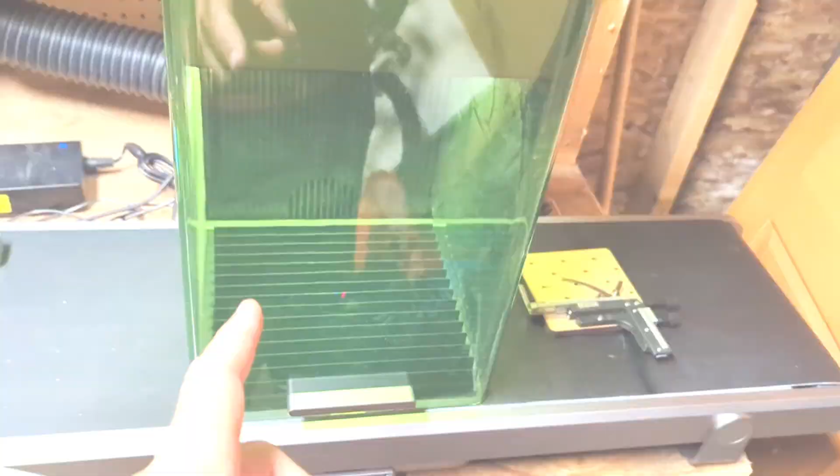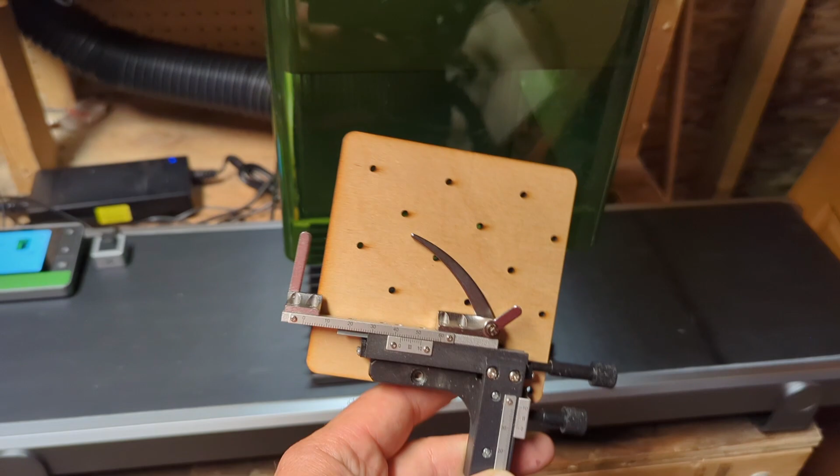So why is this being called the Ultra? Well, there's many reasons behind it. First, let's talk about engravable area. We have 220 square millimeters of engravable area. That's like just over 8.5 inches for you non-metric folks. As a comparison, this is a jig to fit the regular F1, so you can see the area is significantly different. So that's an Ultra feature.

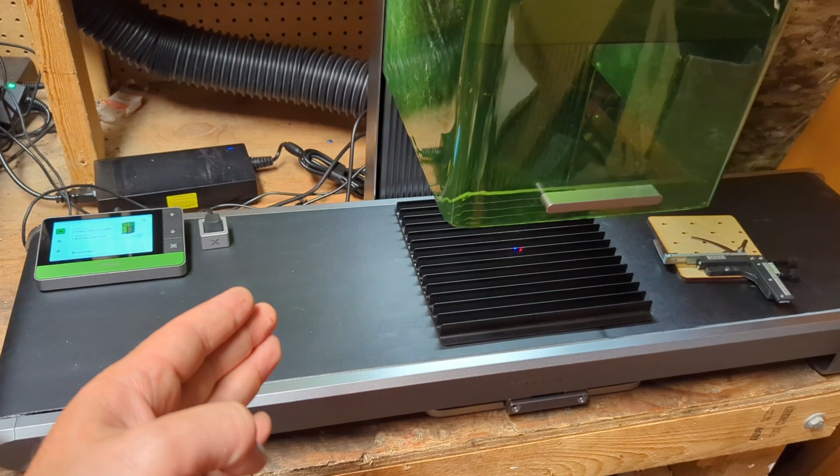If you want to grow it even more, you add on the conveyor belt. Now instead of 220 by 220, you got 220 by 500 millimeters. It allows you to do batches. I'm going to show you how to do it. It actually works surprisingly well. Also, longer items - you're going to see how this was done as well. So you can do this long barbecue scraper. You couldn't do that on regular units.

Another thing for the Ultra is upgrades to the laser. We got two dots down there. One is blue, that's 455 nanometers, 20 watt galvo. So you still have the blue laser, which is really functional. I got other projects over here. Obviously the other laser, that's a fiber laser - I'll talk about that in a second, but there is still a huge use case for having a blue laser. So the dual laser functionality is really cool. You can combine them, I have projects I've done as well. And then the other laser, the big part of the Ultra, is the 1064 nanometer infrared 20 watt fiber laser.

A cool thing with the machine, in true Xtool fashion, it's all enclosed, so the safety is there with the shielding. Also, you don't have the big cable exposed - the fiber cable is inside the machine. So this isn't really portable like the F1, but you can actually move this around. I wouldn't be taking this everywhere I go, it's not mega portable like the F1 is with the handle and the case and everything else. But the fact you can actually move this around and not have to worry about breaking, potentially damaging the fiber optic cable that's on your standard fiber laser systems, that's a big plus with this.

Of course, then you got the built-in air purification or just pulling it out. I had to drill a sizable hole on the side of my shop. So if that's something you're picking up, go on Amazon, order yourself a hole saw while you're at it.

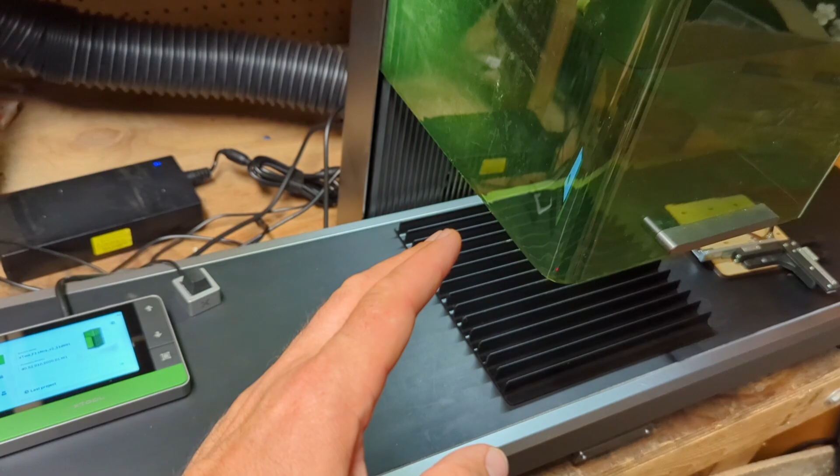Another cool feature with the F1 Ultra is you have autofocus now as well. Again, it's not the hardest thing in the world to do, but in the software, I'm going to show all this stuff in the video. You just push a button, it aligns the beams, away you go. It doesn't work 100% perfectly all the time - sometimes I was doing a blue business card, it was messing up on there. But I would say 9 out of 10, probably 19 out of 20 times, the autofocus works just great.

You also have this nice little panel now. Much like a 3D printer, you can actually put jobs on a memory stick, have them on board. You can go into your menu, so I can go onto it and store jobs right on there to make production really quick. You can push the button on here, or this is one of the accessories, the extra little button. It's like a keyboard button, and actually this is my favorite. For most of the stuff, I'm just hitting this one - brings back nostalgia on the old school keyboards.

There is also a foot pedal option as well. The floor - I don't even want to show you the floor in this shop, it's terrible - so I'm not using it right now, but I'll probably be taking this to my office at some point to hook it up, and I'll be using the foot pedal then. There's also the large air purifier if you're not running the duct system as well.

Again, I'm not having that in here. I got the duct system. So they got you covered for sort of everything you need.

Now, who is this system not for? If all you're looking for is a really high-powered fiber laser and that's it, this might not be the machine for you. It can do a lot of great things because it's a 20 watt fiber, but if you want to do those gorgeous deep engravings you see on pistols, for example, people do it on guns and they look amazing. I'm not a gun guy, but they look amazing, I appreciate the artwork. You're going to want a much higher powered laser, and if that's really what you're focusing on, this might not be the perfect machine for you.

But if you want to be able to do pretty much every type of job there is out there, engrave every material there is, this thing has you covered.

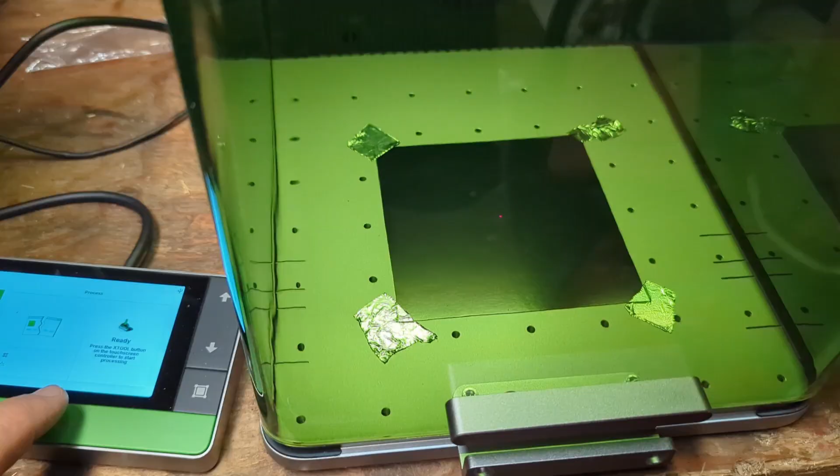What I'll do is jump into the first thing you do when you get this machine, which is calibrate it. Now, the reason I found this impressive - my background, previous to what I do now, for over a decade I made precision laser measurement systems, so I was all about lasers and cameras and calibration. You simply put in a piece of photo paper, hit a button, a couple hash marks are made, and you follow the prompts, punch in the offsets for the alignment, and you're done.

Now the first job I did when I finished the calibration, it said this has to go in this way with the fins going that way, not that way. So I thought, let's just engrave that on the back of this plate - black anodized aluminum, hit it with the fiber, and this is my first time using a fiber. The difference is absolutely massive between the blue lasers. So for metal engraving and that type of stuff, wow, the fiber laser is awesome.

So this took a couple hours to run, but I'll play you a little bit of that fiber sound.

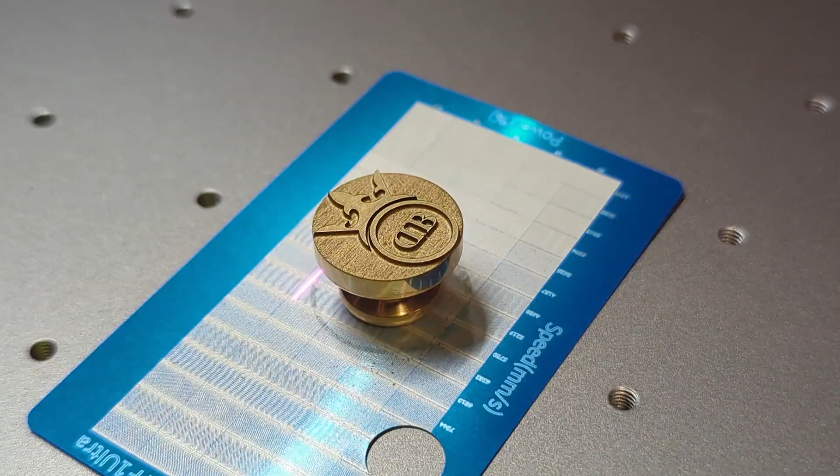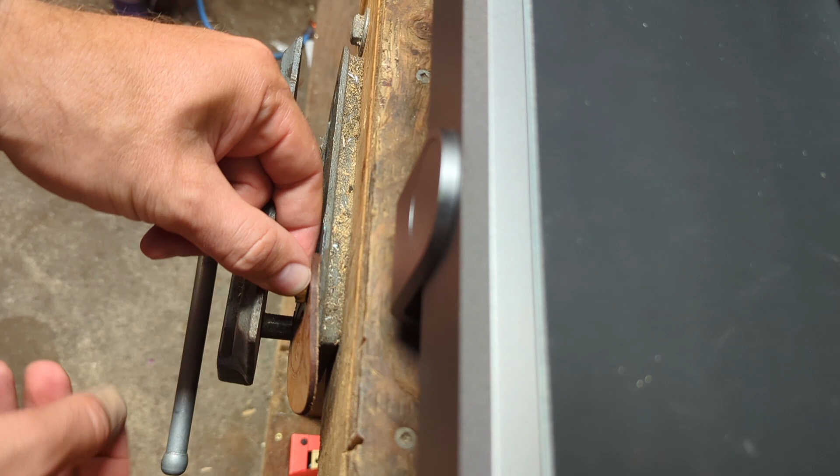Okay, so I'm not a leather expert at all whatsoever. Someone who is will be watching this, possibly just cringing at what I'm doing here. I'm just gonna put it on, I got the leather a little bit wet. I could just give it a whack, but I don't want to damage the laser because I got to share the bench. All right, there we go, I'll just give it a light press in - that's actually a lot of force. Let's back it off and see how it looks.

That's really crude and terrible, but if you know what you're doing, if you're doing some embossing, instead of always having to laser it, you could make the die and then just go ahead and do a whole bunch of them this way, and maybe even hot foil - you can do the hot foil into the leather.

The next thing I wanted to do was some cool high resolution stuff, so for that I got some black acrylic. Another part of the Ultra is the software - it generated all these images. I used the AI tool just to make these test images, and it was just one spot, I didn't have to go to any external software. Everything was there, it took a couple minutes to get all this done and send it to the laser.

We got a beautiful engraving with the IR, but what I was also able to do because of the blue laser is cut these out. You couldn't do that with a normal, just standard IR laser. If you have a CO2 laser and the wavelength is way higher, it can cut acrylic, but for most of the galvo systems that people are referring to out there, the fiber galvo systems, you can't cut acrylic with it. That's a great case for having the dual wavelength lasers.

I'll show you really quick how I did these. So I went into XCS and generated some images using their AI - this is what we came up with. I put some fun cues in there - that's Rodney Dangerfield, we have Bubbles from Trailer Park Boys trying to thread the needle and he's looking very frustrated, and we have this older Sean Connery having a drink I put in there, and he's got a bit of a gorilla hand and some odd fingers.

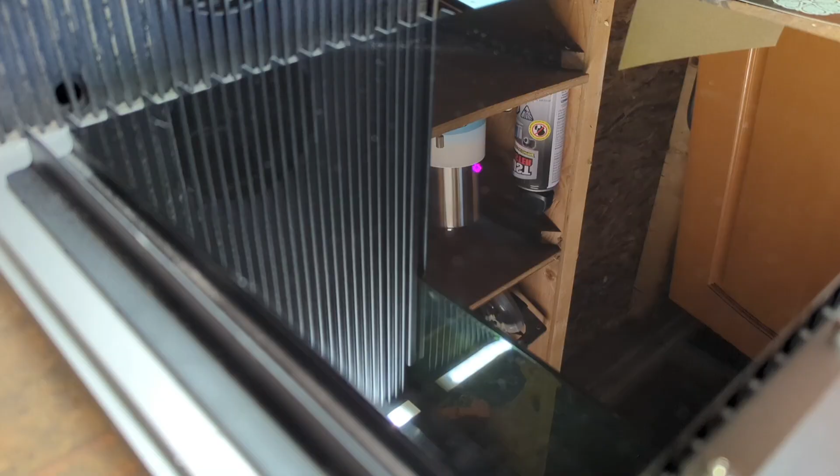Let's take a look at the difference between the two lasers. Here we have the IR laser, and here is the blue laser. The difference in clarity and features you're getting is very significant. This is another use case for having the dual laser. The engraving is superior with the IR laser - you can get amazing images, tons of depth to it. Looks fantastic, but you couldn't cut acrylic with it.

That's where the blue laser comes in - it's just an extra layer. You just trace it out, cut it, away you go. That's the great thing with the XCS software, the material database. First shot, it turned out perfectly like this, and I just used the settings they recommended.

Next thing I did is a quick little project using black acrylic again, cutting it with the blue laser, but then also cutting metal because we have the fiber laser. This is a gold business card. Thought I'd get kind of creative - let me show you that one.

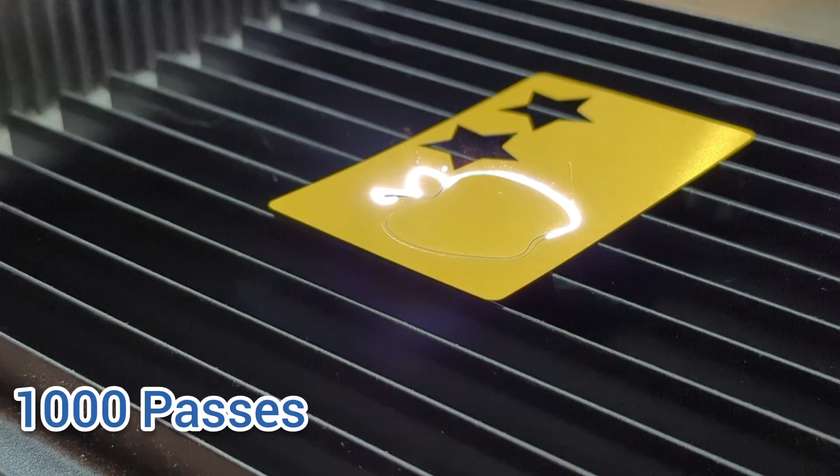I'm trying to be super careful, but look at that - we got this perfect little outline. I don't even know how thick that is. I'm going to measure what that is. We have a 0.9 millimeter wall thickness.

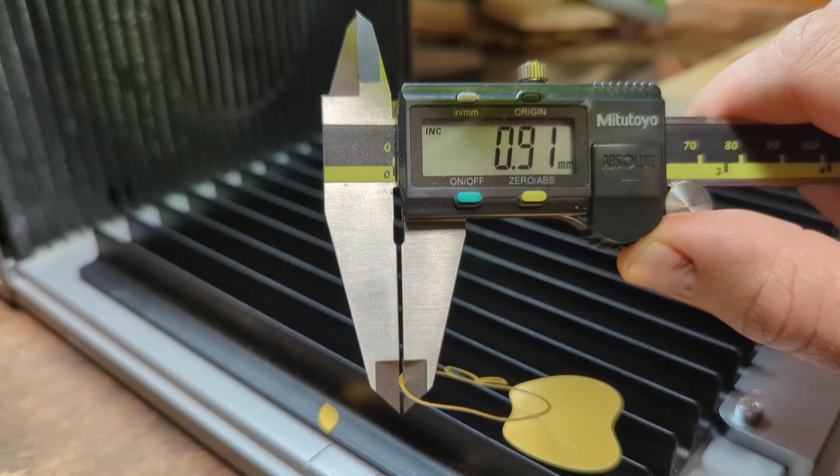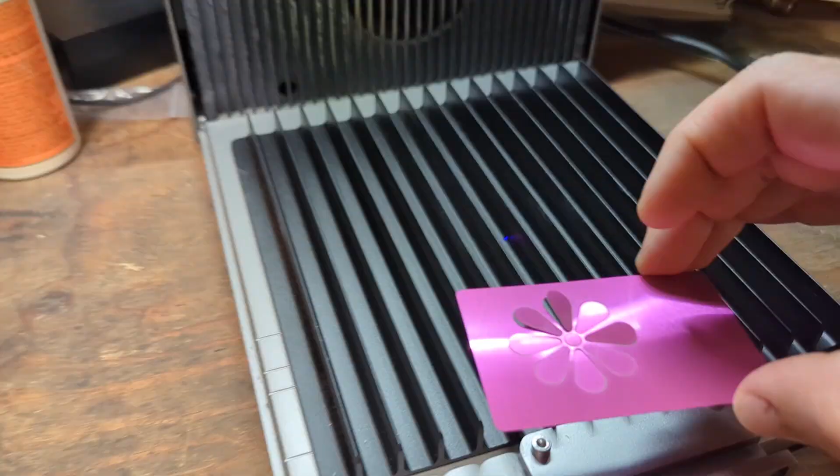Took it a step further, had an idea to do some wood. Same thing, engraved into the wood with the blue laser, cut it with the fiber. I'll show you that - I forgot to hit record, looked really cool but I didn't hit the button. Anyways, those will just, you pick them out. They're pretty much mostly cut out, pop them out like that.

Let's try the inlay. I'm curious how well these fit, if I needed to do some type of kerf adjustment or something like that. Oh, that just fits nicely.

Yeah, a little bit of glue. I'll see if I find some glue and I'll do this. Couldn't find my super glue, but there you go - just put them in there. You get the idea.

Now I selected this because this little stem, I thought surely that will snap off, but it actually cut it out, and it's going to fit in there. Look at that, I'm impressed.

The 3D engraving, the embossing that you can do on materials with this system is really cool as well. You don't have to go anywhere else to generate these depth maps - you can do this right in the XCS software. Of course you can go other places as well, you can also still run Lightburn on this. But the great thing with Xtool is their software package has really grown exponentially since they first started, and they got you covered - they just want to make production and projects really simple for you.

So I did these coasters - let's check that out. What we're going to do now is some 3D depth engraving on these slate coasters. I already have one set up down there. I just put it on this plate here and put a piece of paper because I'm curious - this is going to remove a lot of material, just how much gets accumulated on the paper afterwards.

I went ahead and used Xtool software to do all of this. This is obviously a Buddha that's in there, and you simply go into the software, you pick out your shapes, and as you go further down they already have some stuff for embossment. Now you can get other software and do the 3D depth maps, but let's just go with what Xtool has.

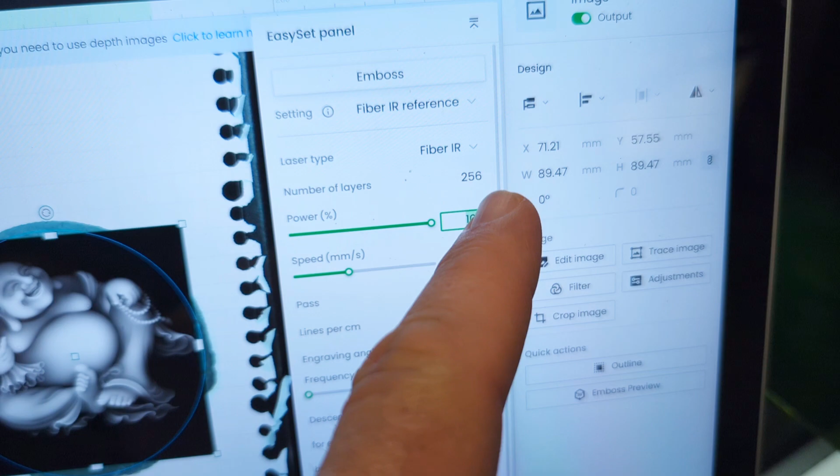So it's fairly straightforward to do, you just follow the steps. You choose the emboss up here, you're going to set your number of layers. I'm using the preset settings - I chose a rock coaster from the database, so Xtool makes it super simple. We're going to just stick with those settings and let it work its magic.

Now you can go on here, they have an embossment preview, so that's going to generate onto the screen, and you can see here what it's going to do is sort of frame it. Now I have round coasters and I don't like that extra framing, so I'm going to try something here.

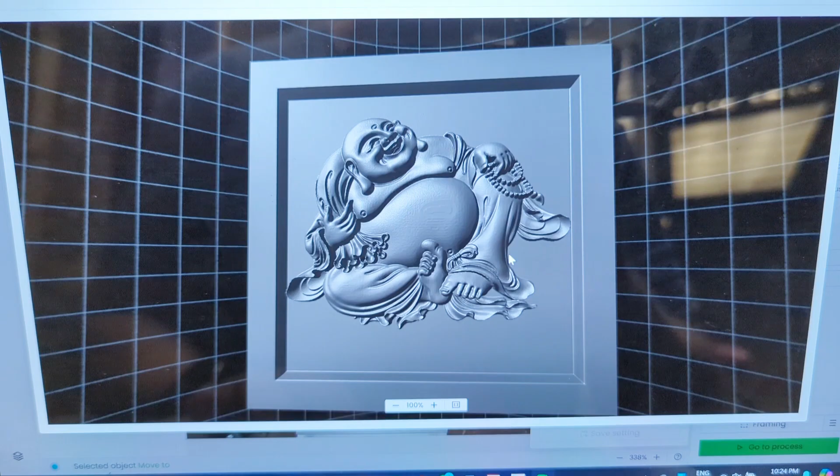I selected the image and hit edit image. I'm going to use the magic wand tool to erase the background. There's a few little sprinkly bits left there, but we'll see how that looks.

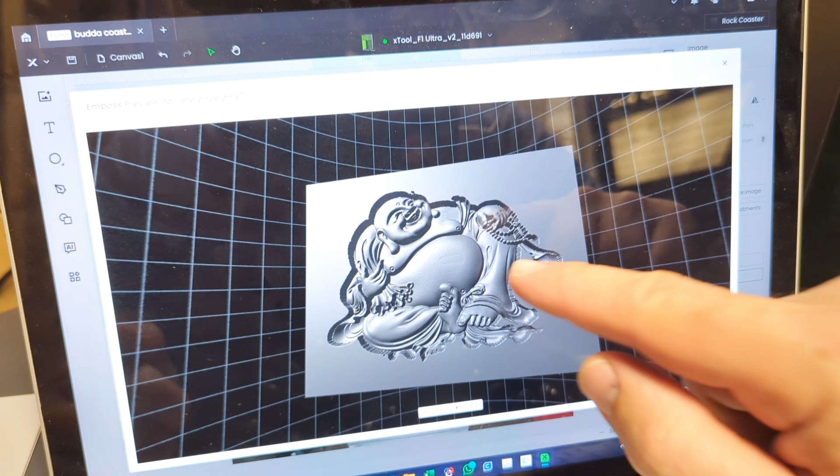Then I can go back to the emboss preview and generate it. I think that's going to be good now. It's removed that frame, so it should just be the Buddha engraved into the coaster. Everything looks good, took a little bit to generate it.

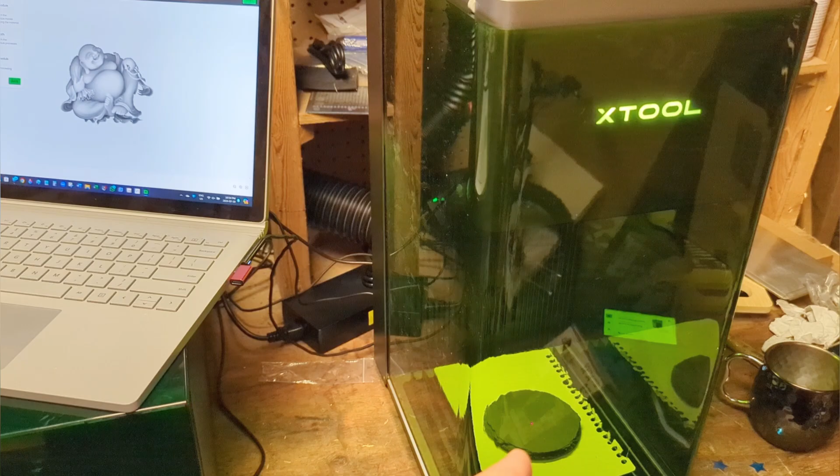So shields down, I'm going to turn on the duct fan here in a moment. I was sent an air purifier to run with this as well, which I'll use when I take this to my office and set it up. This will generate a lot of debris and dust since we're ablating quite a bit of material, so if you're planning to do coasters like this, get yourself a duct fan, whether it's the Xtool one or a different one.

You'll notice in the embossing settings there is an angle feature. What that does is change a sweep angle between each pass. This way it avoids creating regular patterns in your engravings.

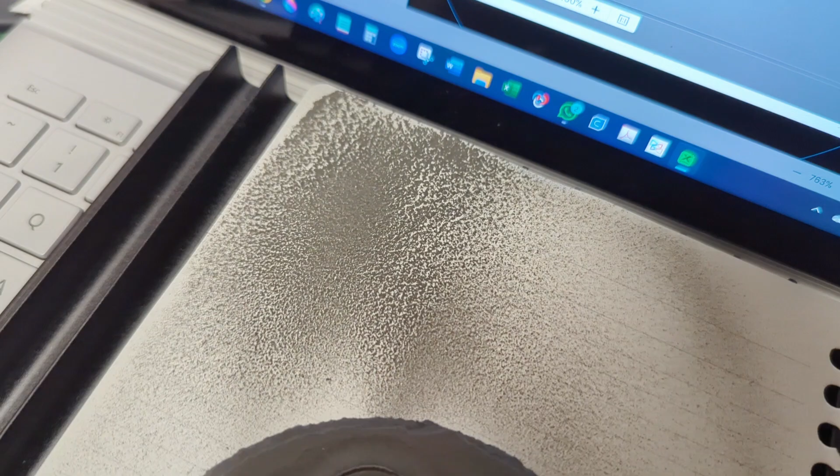First off, I'm fairly impressed by how much the fan sucked up. That's a lot less dust than I expected. We got some residue on here though, let me quickly dust this off.

I'm back from the sink, everything's cleaned out, and I returned with an extra coaster. This is the following day. I thought it looked so good, I needed to do another one.

So there's some nice detail, you can see the engraving. This is really impressive, I have to say, really nice stuff as well. I did just happen to drop it on the floor right before doing the video, which cracked the edge. But if you can see it here, okay, there it is.

I noticed this during the layers, we got some little anomalies in the slate. You'll have minerals in the slate, and it's a different density than the rest of the material, than the rock. So if you run into that, you can have some anomalies in your engraving. Keep that in mind when you do this depth engraving.

I just had a look at it, it might even be a little bit of pyrite that's in there. Keep that in mind if you have a perfectly flat spot, let's say they showed up in this flat spot here - you won't be able to get rid of them. You're going to have a little blip in your coasters.

The XCS software made these super easy to do and have the depth maps all done up, but the time is very consuming. This one was just over 2 hours, and this one, because we were removing a lot more material, was closer to 3 hours. So I'm not sure if these are something you'd do on the regular, like a pack of 4 for people to make it affordable.

You could do that, but they're going to be quite expensive. This could be, though, like a special one-off - if someone wants a special stone plate, maybe for their dog or cat that passed away, you can do a custom one and charge a little more of a premium because you can do it in 3D. But selling these in a 4-pack versus just the regular engraving price, it's going to be very significant just to make up for the time it does take.

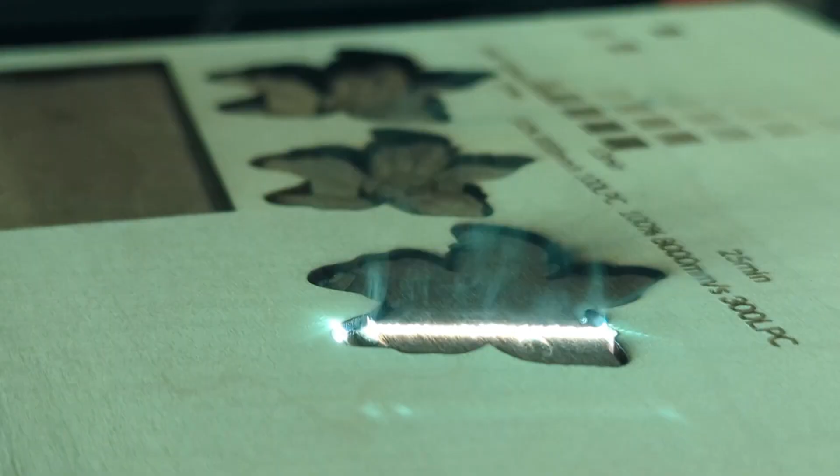The one thing I'm curious about is the accuracy of the camera and the laser system. The laser's coming out one lens engraving, and there's a camera up there with a separate lens checking out what it's doing, so they might not be perfectly synchronized. I just finished this job, and I'm going to check out how close they are. The flower is what I just finished engraving, and I thought I would zoom in and see what it looks like.

So I refreshed the background, the camera picture, and I'm just going to move this out of the way so you can see the overlap. Let me hit Control Z so I can go back. It is absolutely perfect. There's a little bit of extra burning on some of the edges, but other than that, everything is perfectly lined up.

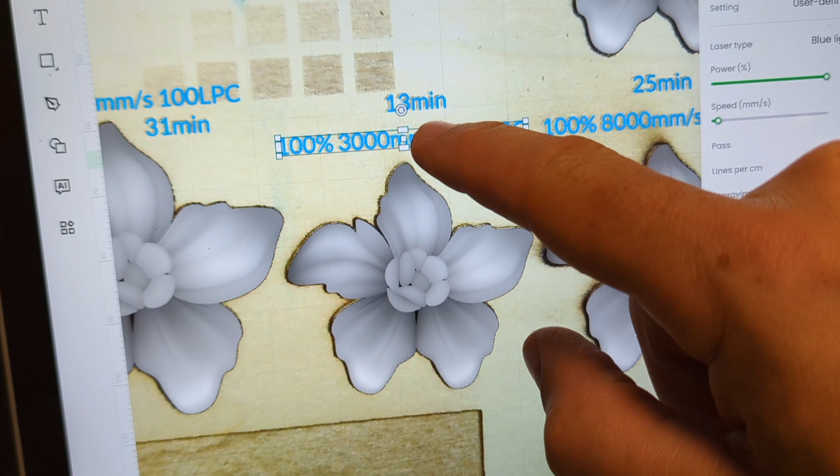I'm going to check the text. These are the other ones I engraved, so you can see again everything is super close. I engraved some of the settings right on the test piece afterwards, and that's all lining up really well.

You know what, I had another idea. I was just going to engrave the time, how long it took, and the settings I used, but I thought let's do a check of this camera with some registration marks. So I have the green and blue layer - this will be engrave, and these will be a score. I'm just going to put them at the extremes, so in the corners, centers, and like so. And this will get engraved.

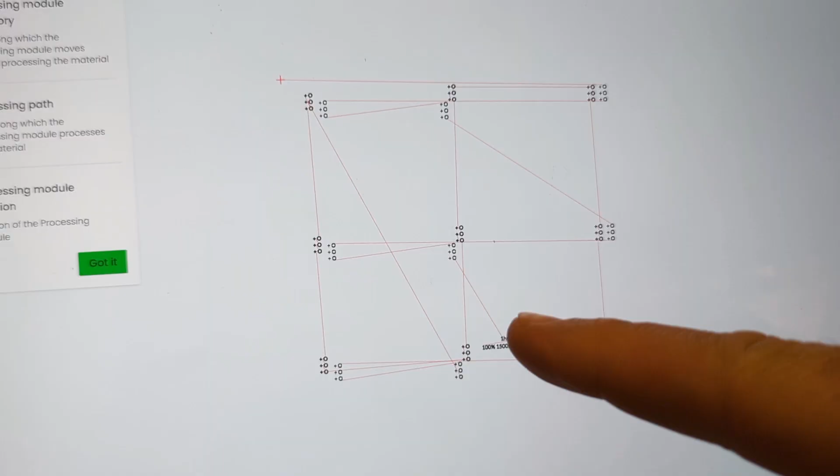I'll refresh the image - they're not on the board right now. I'll refresh the image, then we can see a little bit about the lens, where it's accurate, maybe where it's not, or if it's really, really good. Here's what it's going to do, and we are looking at about 18 seconds to run this test. All right, fire in the hole.

And so now I just refresh the picture. Let's zoom in and have a look. And that's pretty good, so you can see there's the shadow. It's off just a little bit over there. Here we're bang on with that one right there, like we're right overlapping. Let me go around and have a look.

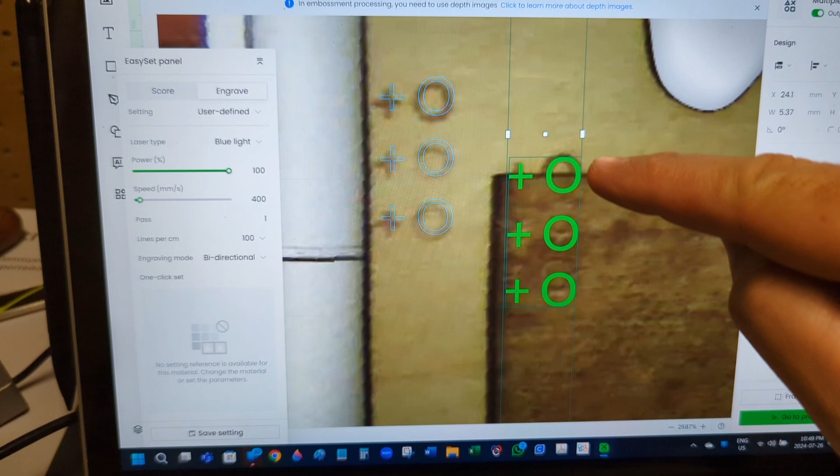So I had a quick look, and as I expected, the stuff in the center is really, really good. I wish there was a little information at the bottom where the cursor was, so when I move it around there were actual coordinates - that'd be handy so you could measure stuff that way. But as you can see, everything is really lined up.

Even most of the corners are really good. There's only one corner that's off a little bit more compared to the others. But if you think about it - oh shoot, just moved it there - yeah, if we had some type of measurement we could do on that, but it's going to be fractions of millimeters on there. So I'm pretty impressed. This was the only corner that was off the most.

All the other positions are really, really good. But the top left on here, again that's not a whole lot, but that was the largest error anywhere on this little grid map that I did for the test. So I'm glad I did the test, and hopefully that builds confidence for other folks with the camera. It's built it for me.

I barely have enough room on my terrible bench, but we're going to use this conveyor feature. I picked up a whole bunch of these triangular pieces from the dollar store. So what we're going to see is how the batch processing system on the conveyor will put your image in the correct orientation no matter how your object is positioned. Let's show you how we do this.

Standard procedure, you do your autofocus, you're going to refresh the camera. The first one that you do on the conveyor, this is essentially going to be your master, so you want to get that right. I just picked a Chewbacca head and aligned everything exactly where I want it. I got the engraving settings where I want them - these are just little bamboo ones I got from the dollar store.

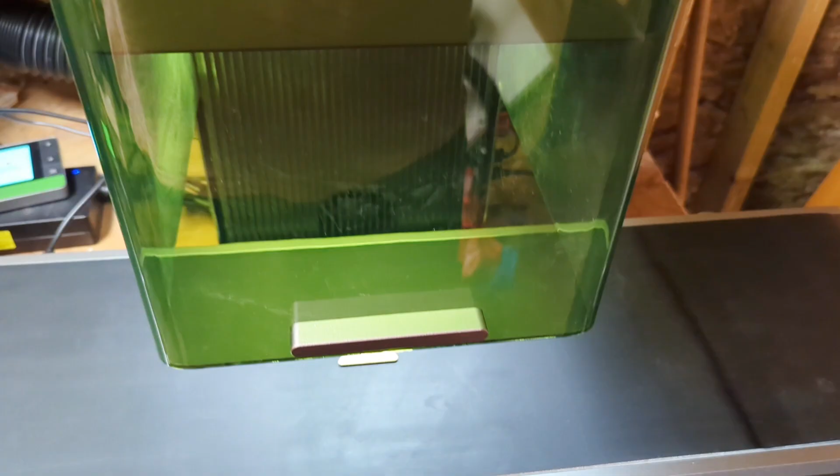I'm going to frame it just to double check everything - so far that looks good. You go to process - you do need your internet connection for this, I guess it bounces it off the Xtool servers or whatever. It's recognizing it, it's ready to go, and it'll generate a preview in a moment. Looks good on the little preview on the conveyor with the camera. There's the image, and we just follow the prompts. I'm going to close the lid, leave a little bit of room - you need your other ones to pass through, so make sure you've got enough room for that.

I laid out the other ones that we're going to engrave. You got to have a little bit of spacing. We'll let the orientation take care of itself. I wouldn't go all the way to the extremes, kind of keep it in the good spots. Keep in mind this is also in beta, so it will be improving as time goes on. We got some noise because I turned on the fan, and we'll just let it take care of itself.

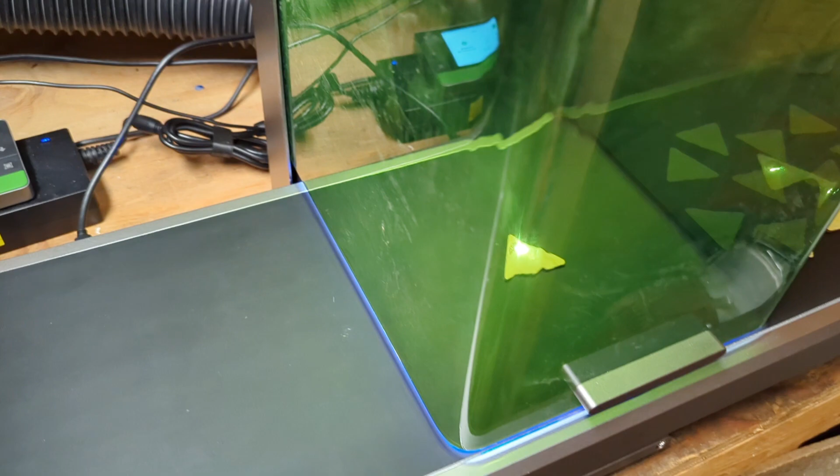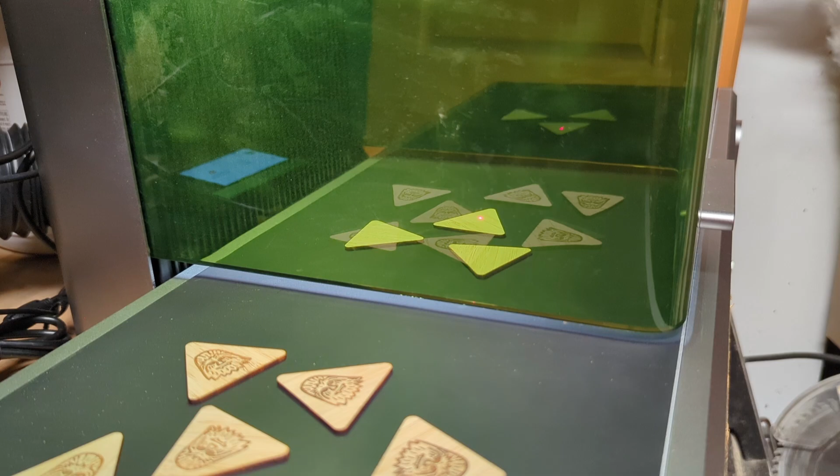First one is wrapping up. It's going to complete, and let's see how this handles it. So there we go, it just went ahead and did it. It's fully automated. You don't have to push any other buttons other than just telling it when to stop.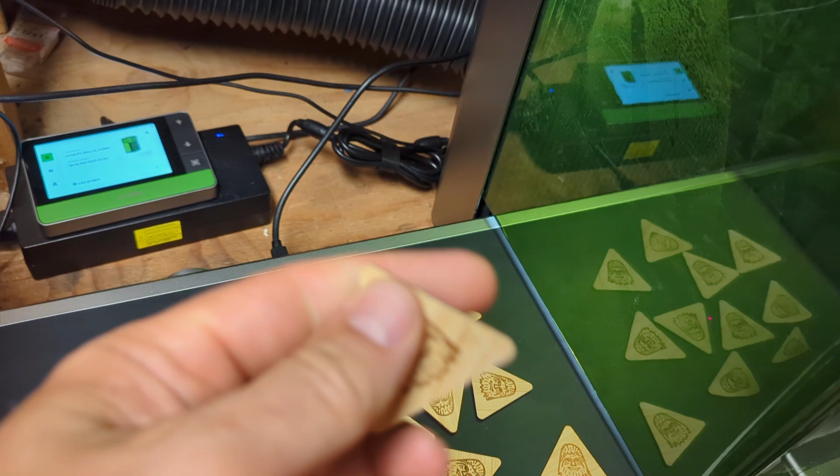Every single one of them, it got it pretty good. There's the odd one that might be off center just a little bit. This is still in beta. I flipped all of them over just to run it again, just to see if there's any issues. Now again, for something like this, it's kind of dumb because it's just going to randomly pick an orientation. So be mindful of that depending on what you're engraving.

But this is great. Yes, I know you could make a jig and maybe it fits 10 at a time or whatever it is. Perhaps you don't have the tools or resources to make yourself jigs. You can just throw stuff on the conveyor and just let it take care of itself and make life much easier. It might be faster to do a jig and push the button and all that stuff, but maybe you're not great at doing jigs. You just don't have the time. You got these little jobs you want to do. This does make your life pretty easy.

If you have an assistant, all they got to do is put stuff over there, have a little basket to catch it over here, and just let the system take over. Again, this is in beta, and there is a suggestion I will make to improve. It'll come in handy for the batches, but just overall for the camera and laser system.

I spent my career in engineering doing precision laser measurement systems, some ablation systems as well. So I'm very familiar with calibration of cameras and lasers.

So when you first start the machine, there's a calibration you go through. It makes two little hash marks on there, and you go into the software to do the alignment. All you really need to do is just expand that. Have a larger target, so the same photo paper, maybe a larger format to do the full engravable area, and just have multiple hash marks all along, and just repeat the same process. That way you can correct the lens in all the different areas, and that will improve the accuracy, especially for the batches and things like that.

So again, Xtool is in beta. They're listening to suggestions from users, also folks like myself. I'll chat with them some more via email if they want some input. But that, I think, would really help with just improving the accuracy on this stuff as well, although it did a pretty great job of this.

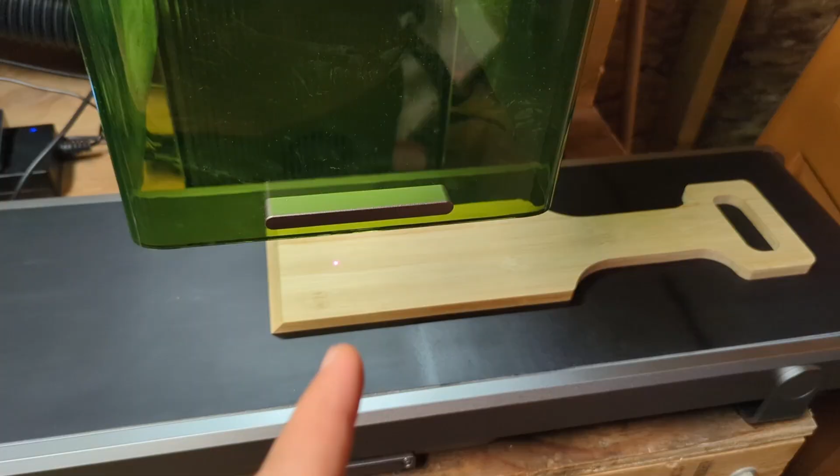So now we will do a long engraving using the conveyor. I got this super cheap barbecue scraper from the dollar store. Bamboo stinks when you engrave it, but we're going to use it anyways. I selected the conveyor large from the drop down. I got Ricky from the Trailer Park Boys saying smokes, let's go. So we'll have that in the main part of the scraper. This should hopefully go up the handle.

The framing is interesting. We start the framing, it takes a moment, and now what it does is it shows you the boundaries and it just sort of pulses the conveyor along. If you stop the framing right here, it's just going to stop and it thinks this is your new start position. So if you start it, just let it finish, or if you stop it, you got to reset things a little bit. So I'm just going to watch to see where it goes, how far up the handle.

I might have to just move the scraper down a little bit or push the graphic up a bit. I want to get the smokes let's go on the handle. Again, this is beta, so maybe this gets updated as well at some point. Another thing is ensuring that it's straight. So I just took a tape measure, measured here and measured here. I haven't done a lot with the conveyor for the large engraving, the long stuff, but I'll just do a quick test so you can see how it turns out.

I gotta say that actually worked out pretty good. I just used some pieces of scrap wood to test it and get the general idea. This was my first real thing I've done on it. I did go back over afterwards to re-hit this. It wasn't quite as dark as the text, but we centered it pretty good.

And that's neat - you can now expand your engravable area. You wouldn't be able to do something like this with the F1 Ultra. You put the conveyor on and you can handle larger items now, so that's really helpful depending on what you're doing. Now, if I was doing a bunch of these, I am very fortunate.

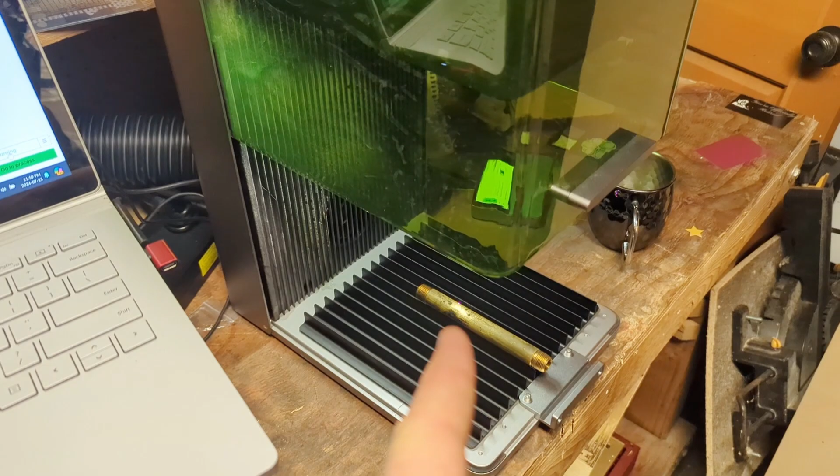Now, about 99% of my videos are all about fountain pens, and so this machine can cut metal. We have a fountain pen nib here that I pulled out. This is from a pen called the Jinhao X159.

I want to make this nib more flexible. So this little slit that's on there - we can't quite get the focus right there - I wanted to extend it further down and then possibly even do a cross cut. That'll give more flexibility to the nib, at least in theory.

I just measured this, it's just under 0.3 millimeters. So that's within the range that this machine is supposed to be able to cut on stainless steel. Let me line this up and give it a try.

It's all set up, ready to go. I'm going to cut essentially a cross on here. It says it will take 15 seconds, so I'm going to find out pretty quick if this works or not.

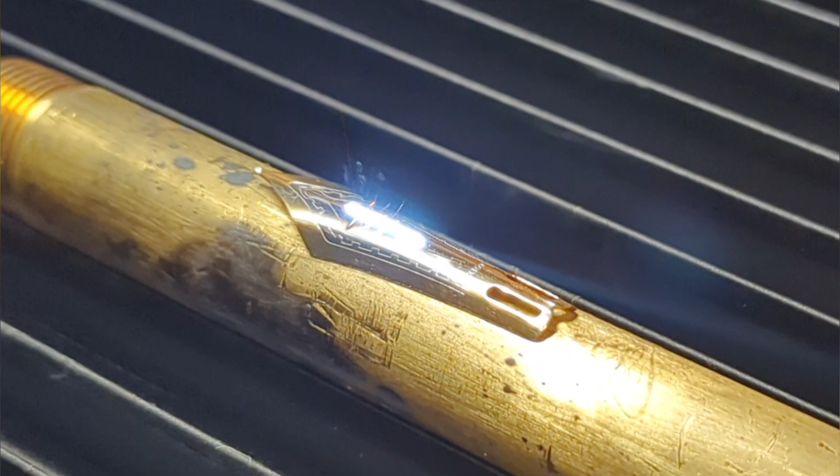So I can't 100% tell if that's through or not. I don't think it quite made it through. I'm going to hit that one more time. I had to run the cuts a few more times, but we got it through.

The one going around here, just because it's radiused, so the distance is getting a little bit further away, wasn't quite perfect. I'd probably do this in the rotary moving forward. Also, we are absolutely getting some heat on there. Possibly I can have a little jig set up where this goes on a sponge or something like that, just to help keep it cool.

I put the macro lens on so we can compare. So that slit there, that is done from the factory with a mega thin slitting disc. And here we are with the laser - we are through. I've adjusted the nib a little bit.

Let's see how much more flex we can get. Let's write with it, just do a super quick test. I'll write with it with no pressure - so this is how the pen would normally write. But now that I cut that slit in there, it's going to have a lot more flexibility. So let's try this.

So if I push down on it, it opens it up, and we get flex in the pen now. So here's a better look - you can just see the difference. So having this laser be able to cut metal, whether you're doing artwork or modifying something you already have to make it work a little bit differently, you need some precision cuts.

This is pretty slick. Next thing I'm doing is one of these super cheap straight razors you get on AliExpress - fun to practice doing work with on steel and blades. Let's see what we can do.

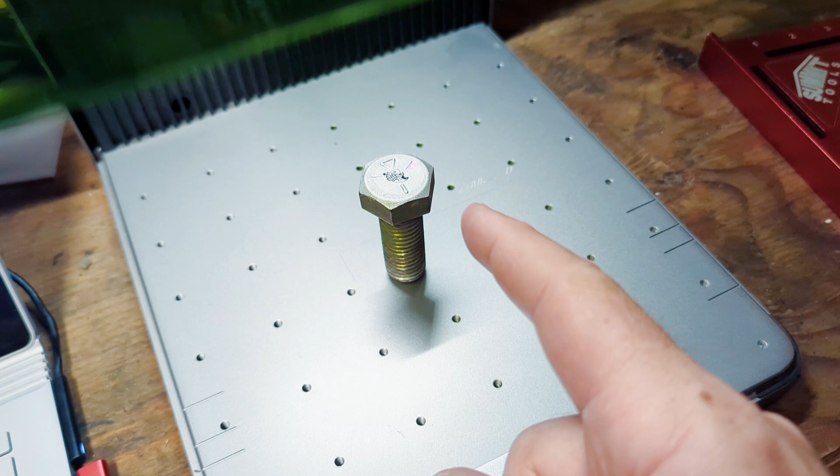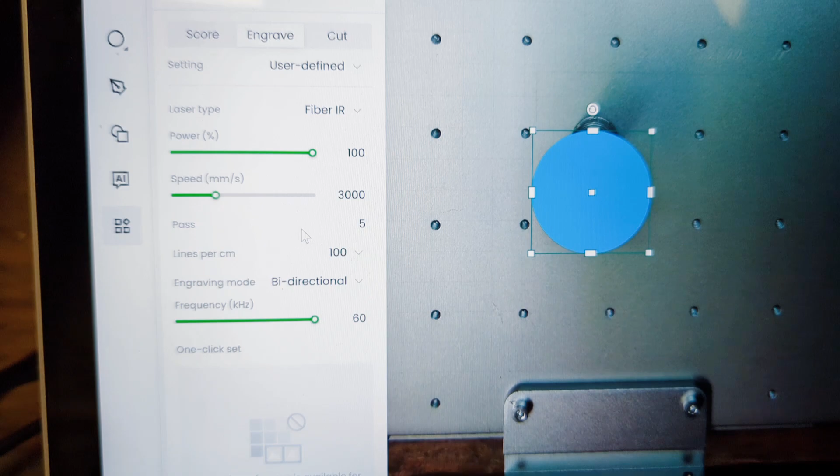I'll show you one thing I would like to see them update on the XCS software. So here we have a bolt, just been playing around with it. Let's say you want to clean it off and do multiple passes. So I got my circle, we're using the fiber, got my settings, and we're going to do 5 passes. But I can't change the sweep angle. When you do the embossing, you can have, I think the default's 15 degrees, so it'll do a pass this way, 15 degrees, and so on and so on.

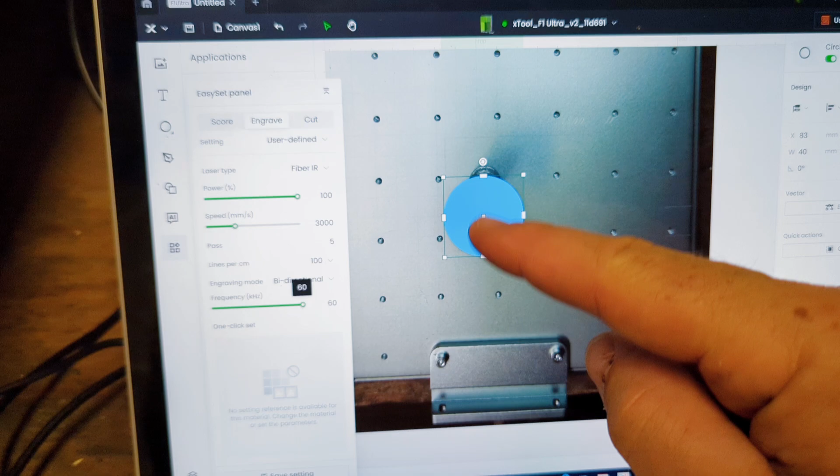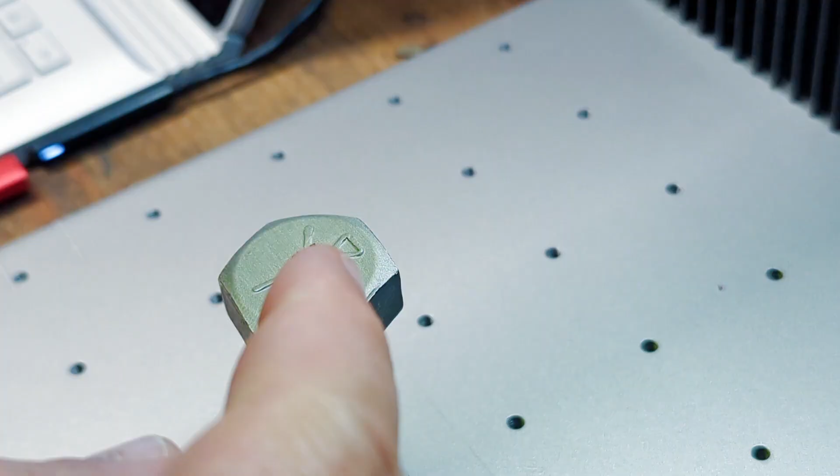But when you're doing just regular laser work, let's say engraving, they just need a little checkbox that allows you to change the angle each time, or else what will happen is you'll do multiple passes, and then in your target you will end up having essentially banding because you're coming at the same direction every single time versus being able to sweep across. They have that on Lightburn. The functionality is here, they just need a little box on the software. The workaround for the time being, of course, is manual mode.

Being able to enable a sweep feature right in the XCS software would be fantastic.

I found this lighter in my car. I engraved it a long time ago. I can't remember if this was with my LaserPecker or just the regular Xtool F1, so low output power IR lasers, non-fiber, just straight diode. So then I flipped it over, and we did it with the fiber laser here on the Ultra, and it's going right down to the base metal. You can see the difference.

So those other lasers were just sort of marking it, it didn't actually really ablate and remove and vaporize material. That's what's happening here, so we're going right through the plating, right down to the base metal, and you can feel that engraving that's in there.

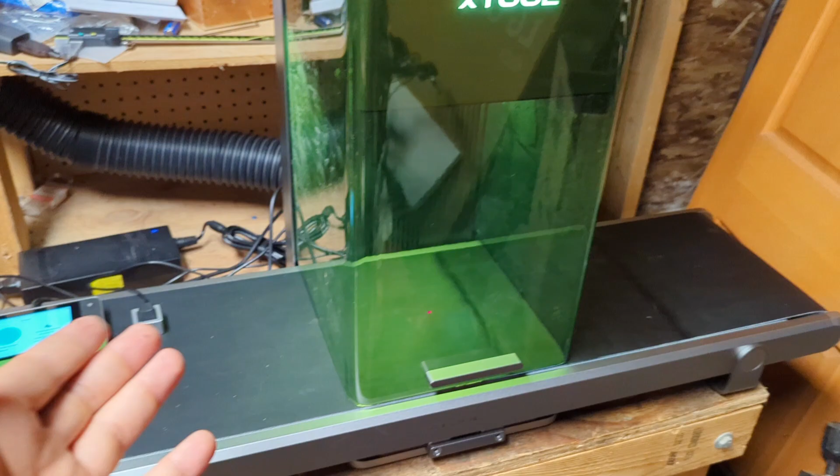So we'll shut things down there. I hope the video helped you better understand the Ultra, what it can do, what it can't do, a few little suggestions I came up with, and also just showing some use cases why a lot of people just look at this machine and say, oh, it has a fiber laser now. Yes, it has a fiber laser, but don't dismiss the diode laser, it is super handy for being able to do all sorts of different projects.

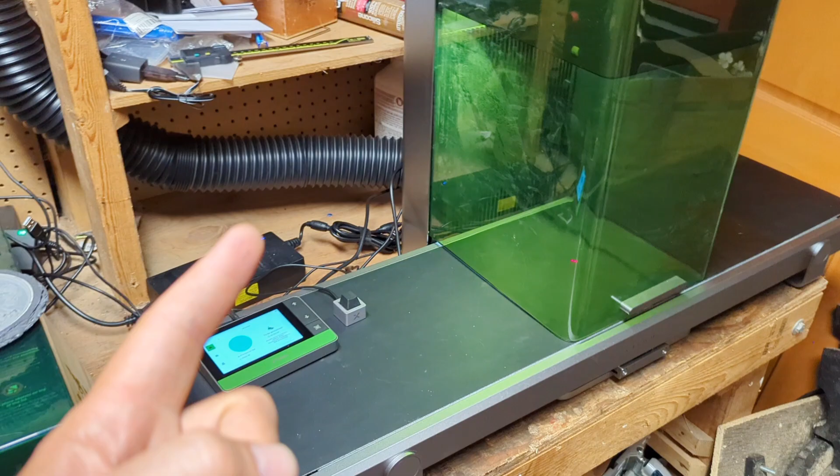For you, the viewer watching this, you didn't see me do any rotary stuff. I do have the chuck, I have some rotary jobs I'm going to do. One of them, it's not going to be with this pen, but I have a titanium fountain pen, and I'm going to get some help from a laser engraving master who engraves fountain pens, metal ones. We're going to anodize it and then do some cool engraving to it. So that's going to be a special video all on its own because there's going to be a lot of detail on that one, that's going to be a ton of fun. Keep your eyes peeled for that.